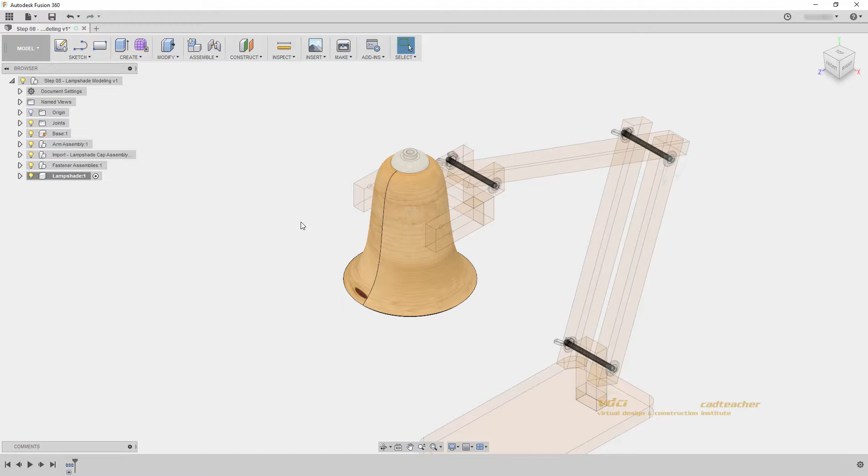I will activate my lampshade component, zoom in, and orbit my model so that I can see this side of my lampshade arm. I will create a new sketch and host it to the inside of this arm.

Let's slice our sketch so we can see the inside of the arm, which creates a temporary section through our model. The lampshade is now hidden so we can have a better view of what we're modeling. I will hit C for circle and draw a circle here.

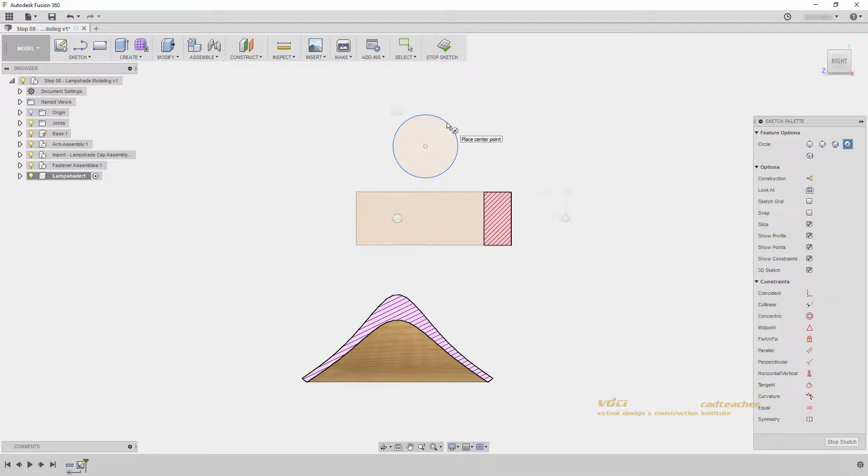Now we can go concentric, circle to circle, and D for diameter, and let's make this a diameter of 20. This is not necessarily a parametric component; I want this to be a set width. So I'll stop my sketch, and we'll jump back into our model.

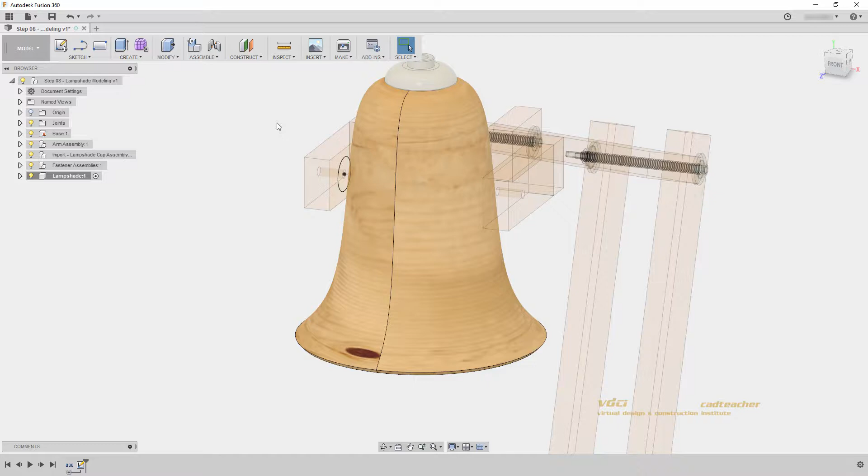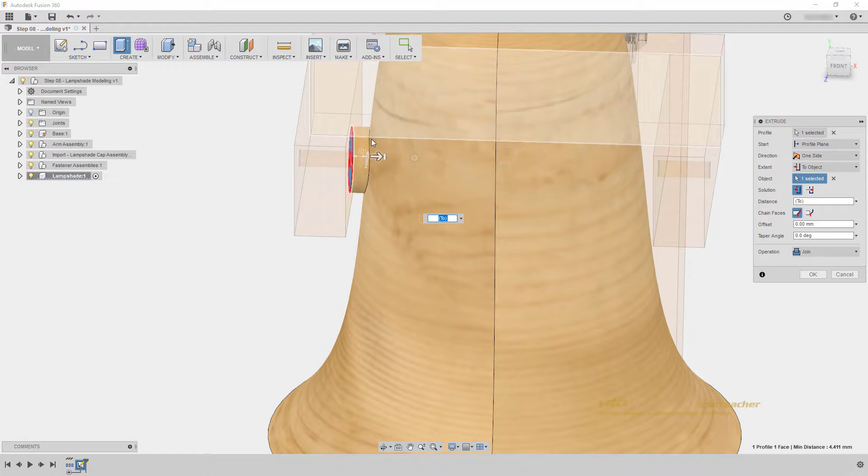I can now go extrude and extrude this donut shape towards my lampshade. I want this shape to match up exactly on my lampshade, so I'll change my extent from distance to To Object and select my lampshade body. You can see it has extruded to the edge of my lampshade. Before we hit OK, let's change this operation to new body, and now we can hit OK.

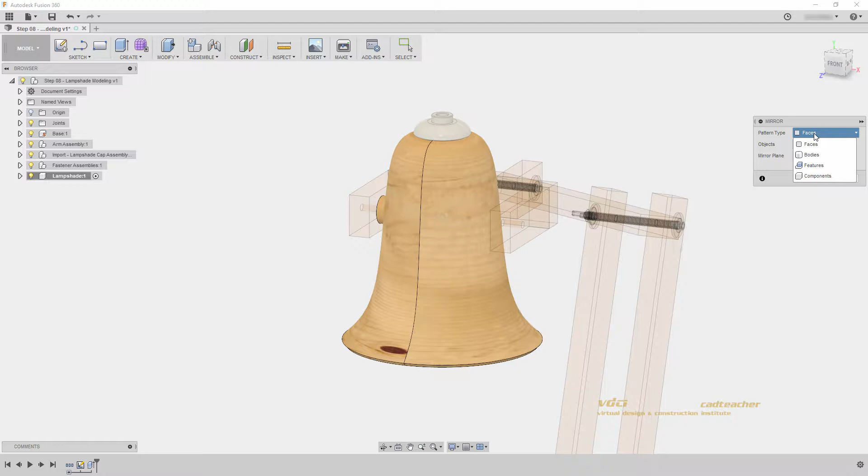Next I'd like to create a copy on this side, but instead of using copy, I will use mirror. Let's go create mirror and change our pattern type to bodies. I will select this body, and my mirror plane will be my origin plane because my lamp is symmetrical. We can see a preview, and when we hit OK, we now have 3 bodies in our lampshade component: our main body and these 2 outside bodies.

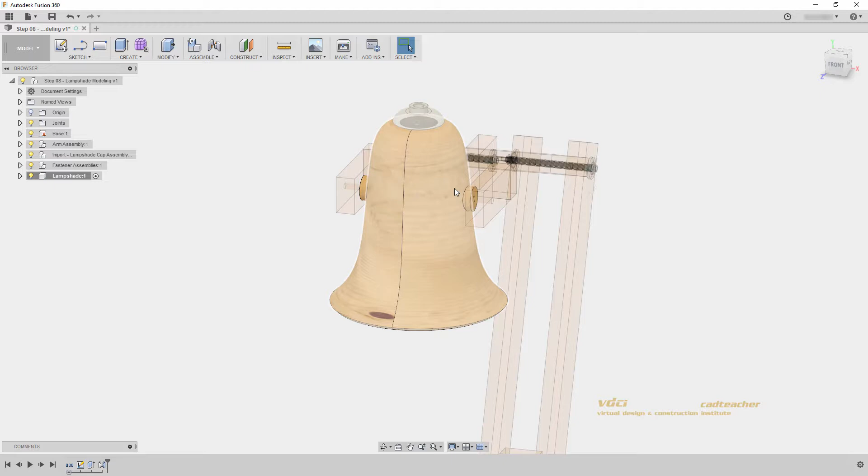Now that my modeling is complete, I will right-click and Isolate my lampshade component so we can finish modeling. I will go to Modify, Combine, so we can combine these 3 bodies into one solid body. I'll select my 3 bodies and hit OK to combine them. We can now see we have our original surface and a new combined body.

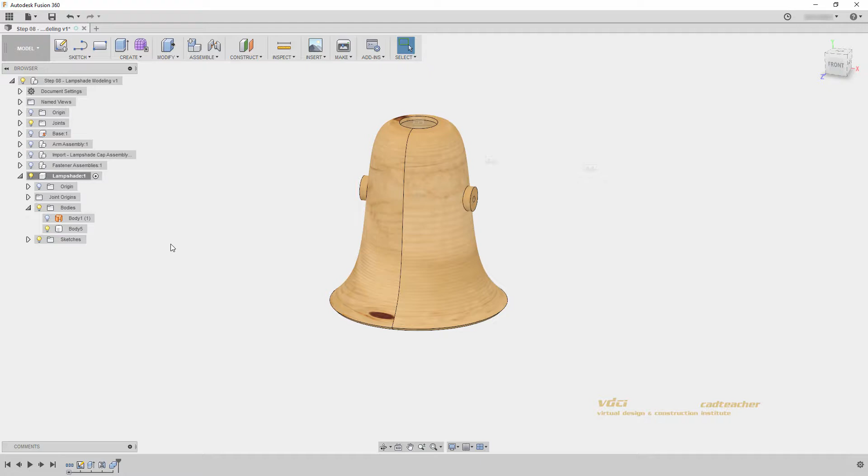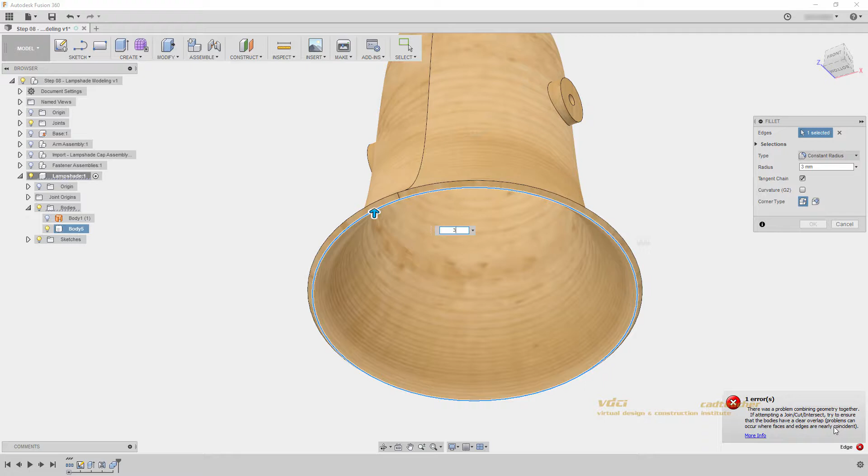Now we can begin adding some fillets to round off the model in case we send this to a 3D printer. I will go Modify, Fillet, orbit to the bottom of my model, and select this inner edge. You can drag to set a distance, but I'll type 3 millimeters, and we might get an error. If you get an error, you may have to change your distances slightly for it to perform properly. I will go 2.95 millimeters and hit Enter, which creates a very small lip on the edge of the lampshade, but it won't be noticed when 3D printed.

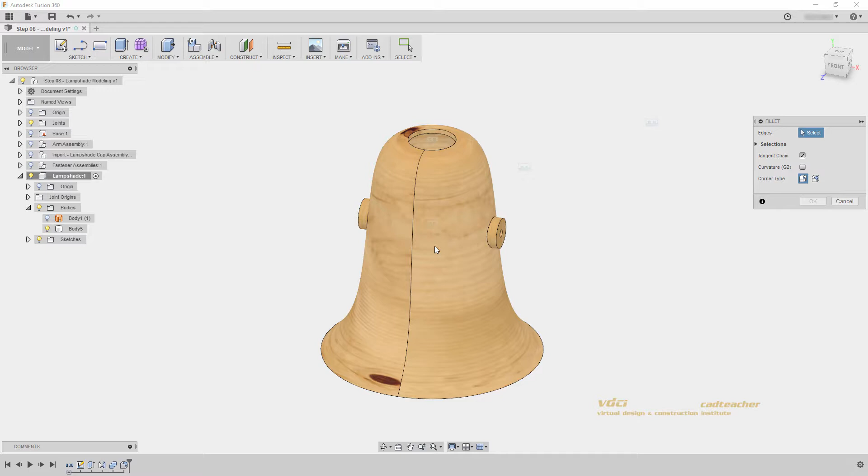I can continue adding fillets by going Modify, Fillet, and selecting this inner edge and this inner edge, applying a fillet of 2 millimeters. I'll go Modify, Fillet one last time and select the outside edges here, doing a very small fillet of 0.5 millimeters, just to get them a little more rounded.

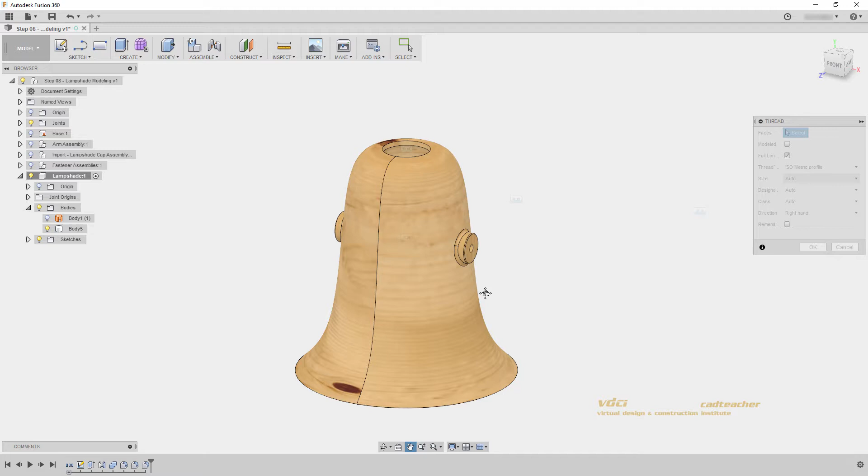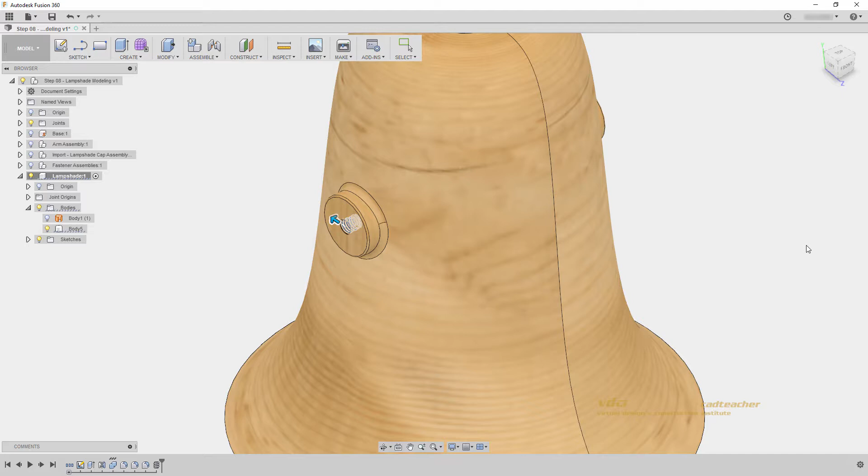The last step is to add some modeled threads to the inside of these holes so we can attach it with screws. I will go to Create, Thread, zoom in, and select the inner cylinder to place a thread. I need to check the Modeled checkbox to create a modeled thread, and I will change this to left hand. Remember your designation for when we're placing our screws. I'll hit OK and orbit my model to repeat that step: Create thread, select my inner cylinder, modeled, and left hand. I'll hit OK, go to my home view, and we can see our lampshade modeling is now complete.

So I will first save my file and then right-click Unisolate to show the rest of my model.

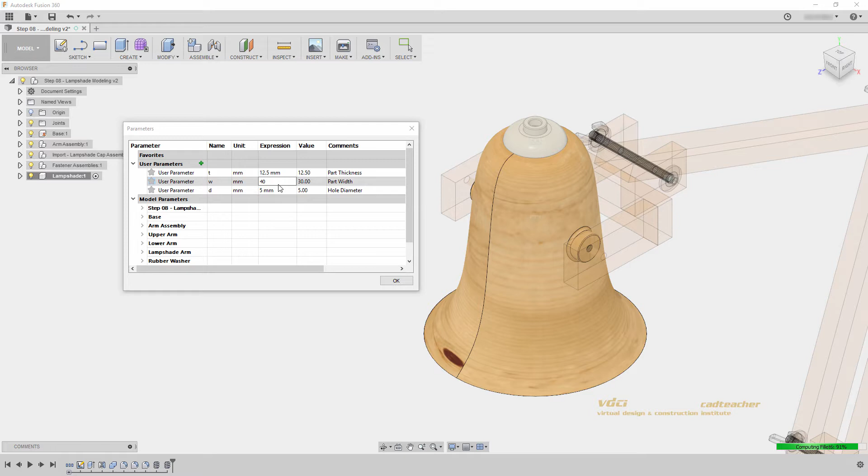Let's see what happens when we update our user parameters. If I go Modify, Change Parameters, we can see that if I change this to 12.5, my lampshade moves with my model. Again, we can change the width parameter, but let's zoom in on these holes and my threads here.

Let's see what happens when I change my hole diameter parameter. If I change this to 6, we see the hole update on my lampshade arm, but the thread has not changed sizes at all.

This is because the thread has overridden the hole in my model. I will change this back to 5 so I can show you what I mean. If I move my timeline before the threads and go Modify, Change Parameters, now when I update this to 6...

...you will see the hole size change in my model. However, if I slide this back forward again, the threads will override that hole size and automatically change it back to a 5mm thread size.

I can double-click my thread to edit it, and we can see this is because size is determined in a set list. I have no opportunity to type in a value; I have to choose from this list.

So Fusion does not automatically update your modeled threads, so this is something to be careful of, especially when using user parameters to define hole size.

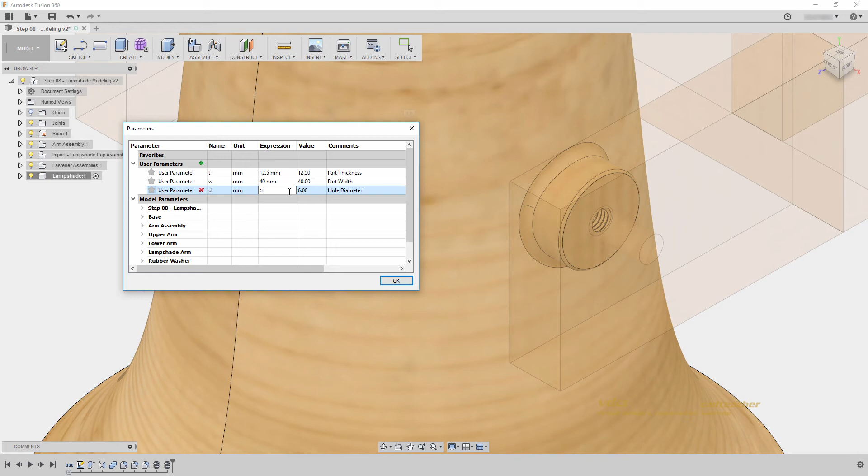So I will go Modify, Change Parameters one last time, change this back to 5, and we will just have to be careful to remember, just like when we bring in McMaster-Carr components, that modeled threads will not update parametrically.

I will go back to my home view and activate my top component. Make sure that you change your parameters back to 15, 30, and 5, and I'll hit OK.

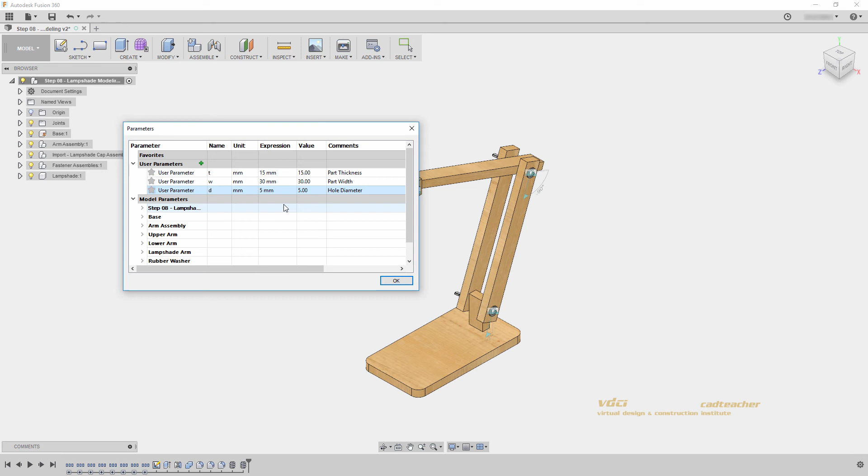And the last step is to group our features in our timeline. I'll select here and here holding Shift, right-click, Create Group. Let's save our file.